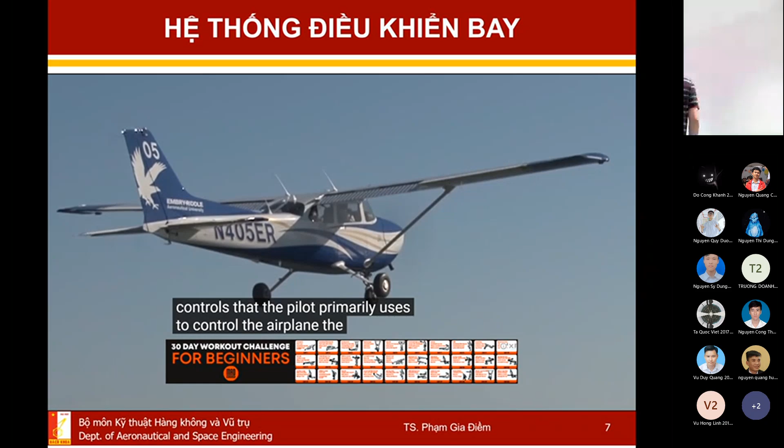Primary flight controls are simply those flight controls that the pilot primarily uses to control the airplane. The three primary flight controls are the ailerons, elevator, and rudder. Secondary flight controls, on the other hand, are used to change the airplane's performance and lighten the pilot's workload. The two secondary flight controls we'll discuss are the flaps and trim.

The pilot controls the ailerons and elevator with a yoke or stick, and the rudder with the rudder pedals. In most general aviation airplanes, as the pilot moves the controls, he or she is moving steel cables or push rods connected through other linkages that physically move these controls.

As the control surface is deflected, the airflow is changed, which results in an aerodynamic force changing the airplane's path through the air. Let's investigate the three primary flight controls in more detail.

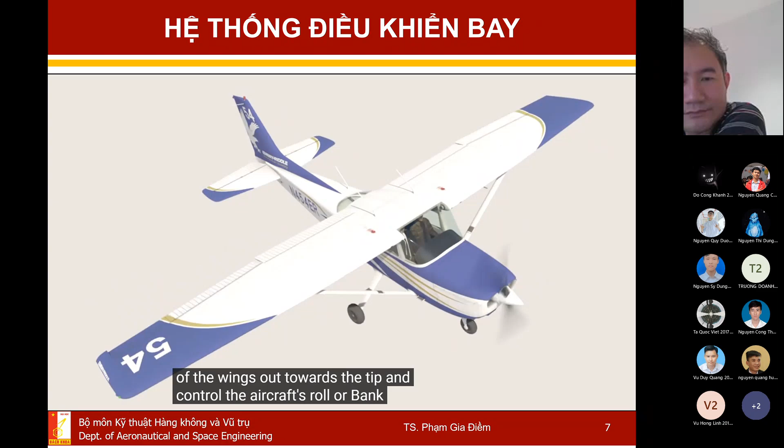The ailerons are located on the back end of the wings, out towards the tip, and control the aircraft's roll or bank. When the pilot moves the controls to the left, the left aileron is deflected up, creating a downward force, and the right aileron is deflected down, creating an upward force. This results in the airplane rolling to the left.

The opposite would happen if the pilot were to move the controls to the right.

The elevator is attached to the back of the horizontal stabilizer and controls the airplane's pitch, which allows the airplane to climb or descend. When the pilot moves the controls forward or aft, the elevator rotates, deflecting the air and creating a force that results in the airplane's pitch changing.

If the pilot pulls back on the controls, the elevator will move up, creating a force that pushes the tail of the airplane down, thereby making the nose pitch up and causing the airplane to start climbing.

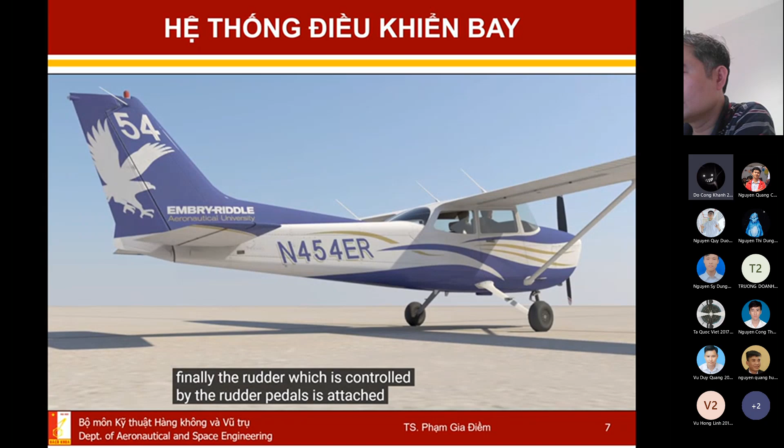Finally, the rudder, which is controlled by the rudder pedals, is attached to the back end of the vertical stabilizer. As the pilot pushes on one of the rudder pedals, a cable connected to the rudder allows it to move. Just like the other flight controls, as air moves around the deflected rudder, a force is applied, making the airplane yaw. Simply, if the pilot pushes the left rudder pedal, the nose of the airplane will slide to the left.

The easiest way to envision this is to think of an airplane suspended on a string above the ground. If you and your friends were to walk up to the rudder and push as hard as you could towards the right, what do you think would happen? The tail of the airplane would move to the right, and the nose would move to the left. It's that simple. We use the rudder in coordination with the ailerons to turn the airplane.

The primary flight controls, then, fundamentally work the same. The pilot moves a control in the cockpit, which, through cables and other linkages, moves that control surface. As that surface is moved, the airflow around it gets deflected, creating a force, and results in the airplane either rolling, pitching, or yawing.

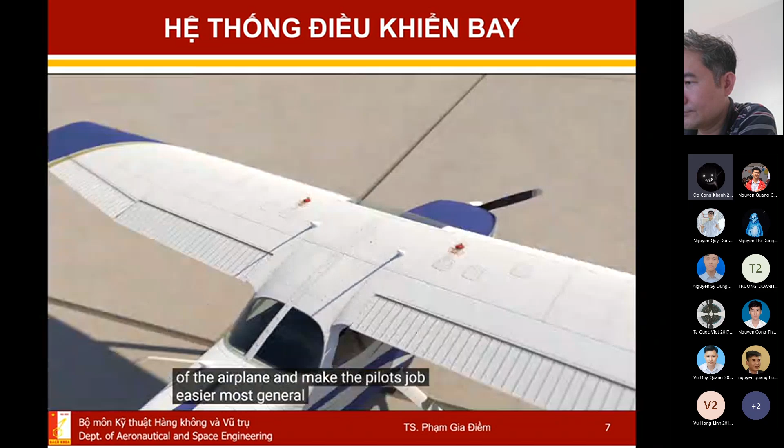In order to help improve the performance of the airplane and make the pilot's job easier, most general aviation airplanes are equipped with flaps and trim, known as secondary flight controls. Let's examine these further. The flaps are located on the back side of the wing, close to the fuselage.

They are primarily used to help increase lift during takeoff and landing. The pilot controls the flaps by moving a lever in the airplane, which either electrically moves the flaps by a motor, like on the Cessna 172, or the pilot manually moves the flaps using a lever, like on the Piper Arrow. In either case, as the pilot extends the flaps, the shape of the wing changes, which increases lift.

This allows the airplane to fly at slower airspeeds and make steeper approaches to landing. This is extremely beneficial during takeoff from a short runway because it allows the airplane to take off at a slower speed, meaning it will use less runway.

During landing, the pilot uses flaps to allow the airplane to land at a slower airspeed, using less distance to decelerate and stop.

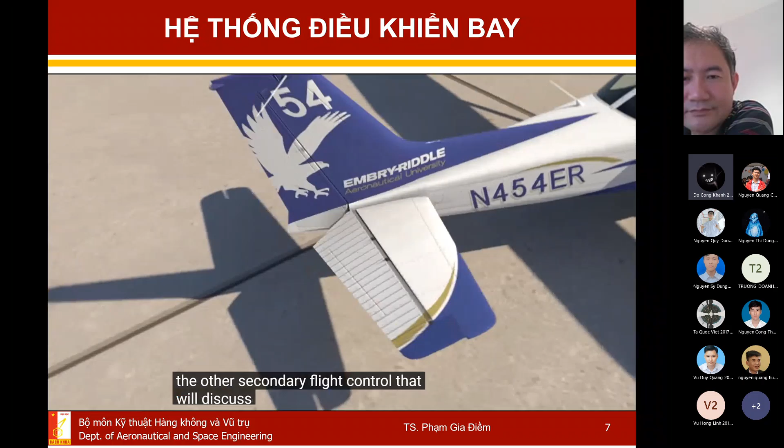The other secondary flight control that we'll discuss is trim. Trim is used to make the pilot's job easier and allows the airplane to essentially fly itself with fewer control inputs by the pilot.

The Cessna 172, like most training airplanes, has two trims: one that the pilot can directly control through cables on the elevator, and the other a ground-adjustable tab on the rudder. The elevator trim is typically controlled through a wheel inside the cockpit labeled nose down or nose up. As the pilot moves this wheel, the cables adjust the elevator trim tab, located on the aft or back end of the elevator.

Usually during takeoff, the trim tab is in its neutral position, meaning it is just about flush with the elevator. As the pilot climbs, however, he or she may trim the airplane to help relieve control pressure and prevent pilot fatigue. If he or she wants to climb at a specific airspeed, the trim can be adjusted to maintain that airspeed.

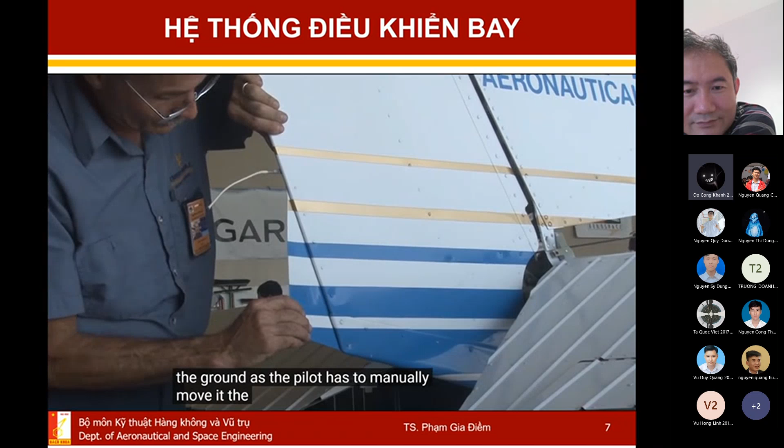The rudder has a ground-adjustable trim tab, meaning it can only be adjusted while on the ground, as the pilot has to manually move it. The rudder's ground-adjustable tab helps the pilot during climb because of the left turning tendencies the plane has while climbing. We'll talk more about those turning tendencies in a future lesson.

It is obvious that flight controls are a necessity for the pilot to fly the airplane. The pilot manipulates these flight controls to achieve the desired performance out of the airplane. Now that we have a basic understanding of the components of the airplane and how the pilot controls different surfaces, let's go under the hood of the airplane and investigate the power plant.

Ok, the flight controls consist of various...

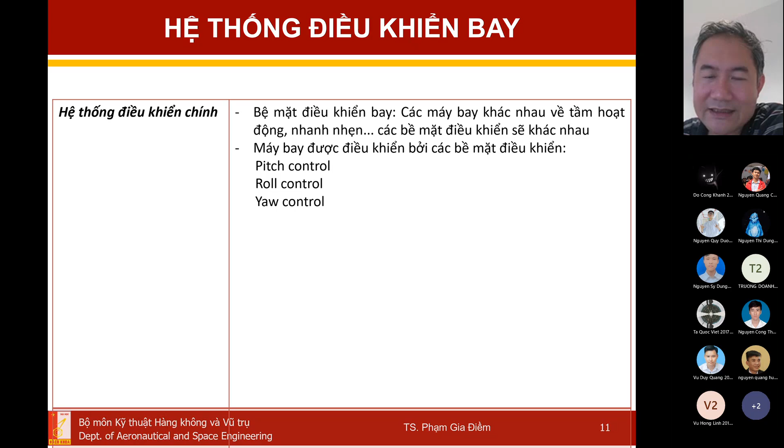Ví dụ như tàu lượn chẳng hạn, tàu lượn dạng không có động cơ, các bạn có thể lao từ trên đỉnh núi đi xuống mà nó cứ dựa vào khí động của luồng khí thì người ta vẫn phải bay được, giống như bề mặt của con chim đại bàng lượn trên trời, hoặc con chim hải âu vân vân.

Xem đi, giải thích qua một chút cho nó hiểu.

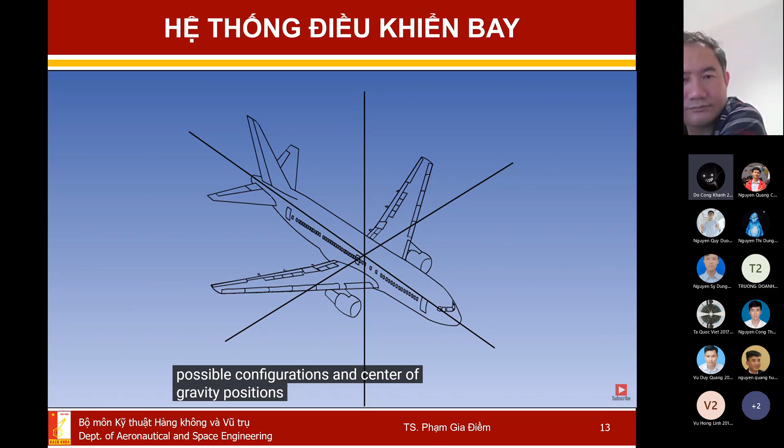For steady flight, the aircraft must be in a state of balance, with zero moments around its axes. The primary flight controls are designed to enable this to be achieved for all possible configurations and centre of gravity positions. The controls are also required to manoeuvre the aircraft around its three axes. The three axes about which an aeroplane rotates are the lateral axis, the longitudinal axis, and the normal axis.

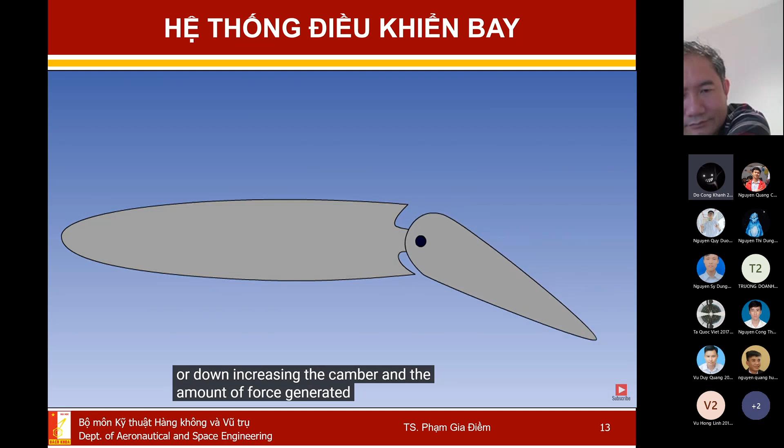The movement around an axis is produced by changing the aerodynamic force on the appropriate aerofoil, wing, tail, or fin, and this may be done by changing the camber of the aerofoil by deflecting a control surface, changing the angle of attack or incidence of the aerofoil, or decreasing the aerodynamic force by spoiling the airflow. The most common method used is to change the camber of the aerofoil. This is done by deflecting a control surface on the trailing edge of the aerofoil, either up, decreasing the camber and the amount of aerodynamic force generated, or down, increasing the camber and the amount of force generated. This principle can be applied to control about each of the axes.

The aircraft rolls about its longitudinal axis. The devices most commonly used to control roll are the ailerons. The ailerons are operated by rotating the control wheel or yoke, or by moving the control column or stick laterally. Rotating the control wheel clockwise will cause the left aileron to move down and the right aileron to move up. The aircraft will bank to the right. Counterclockwise rotation of the control wheel will have the opposite effect. That is, the aircraft will bank to the left.

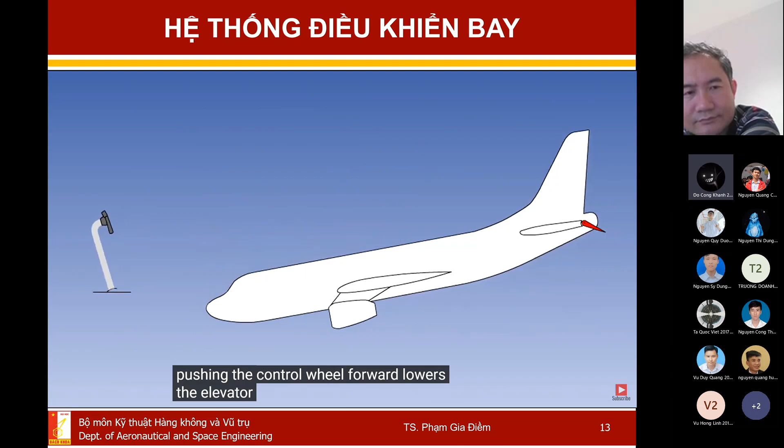The aircraft pitches about its lateral axis. Pitch control is most commonly achieved by the use of elevators. The elevators are controlled by moving the control wheel or control column fore and aft. Pushing the control wheel forward lowers the elevator and the aircraft pitches down. Pulling back on the control wheel raises the elevator and the aircraft pitches up.

The aircraft yaws about its normal axis. Control in yaw is normally achieved by the use of a rudder. The rudder is controlled by the rudder pedals. Pushing the left pedal forward causes the rudder to move to the left, and the aircraft nose to yaw left. Pushing the right pedal forward causes the rudder to move to the right, and the aircraft nose to yaw right. The ailerons, elevators and rudder are known as the primary flight controls.

That is the end of this introductory lesson. You now know that ailerons control the roll of the aircraft about its longitudinal axis, that elevators control the aircraft's pitch about its lateral axis, and that rudders control yaw about the normal axis.

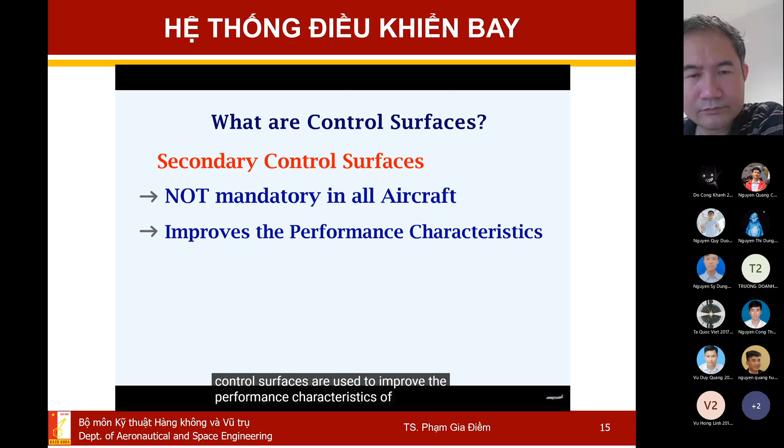Now let's look at the secondary control surfaces. Unlike primary control surfaces, these are not mandatory in all aircraft. These control surfaces are used to improve the performance characteristics of the airplane and also provide assistance in flying the aircraft. Now let's look at some secondary control surfaces.

The next secondary control surface we will look at is the slats. Slats are located on the leading edge of the wing. They are also classified as a high lift device. Like flaps, the slats can only extend downwards. As it goes downwards, the camber increases, so the lift also increases because of the increase in CL. The main advantage of the slat is that it increases the stall angle, so the aircraft can fly at a higher angle of attack. Like the flaps, the slats also have different configurations and are used during takeoff and landing.

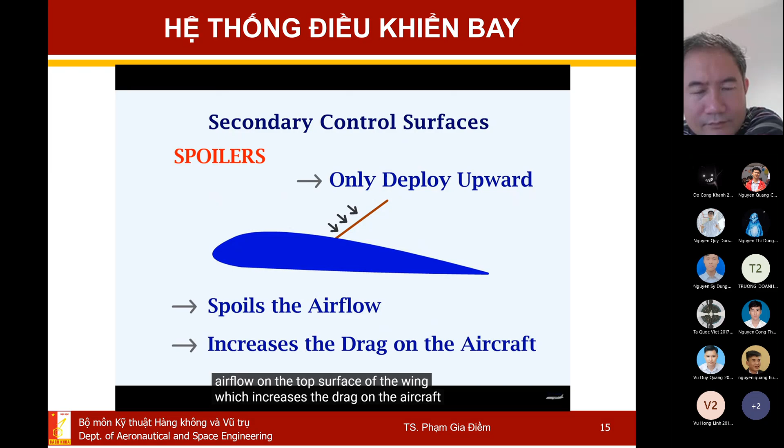The next secondary control surface we will look at is the spoilers. The spoilers are located on the upper surface of the wing. They are mainly used to reduce the speed and the lift of the aircraft. The spoilers can only deploy upwards. This spoils the airflow on the top surface of the wing, which increases the drag on the aircraft. Spoilers are used in flight to reduce the aircraft's speed and to rapidly decrease the aircraft's altitude. They are used during landing to rapidly increase the drag to stop the aircraft safely. The difference between spoiler extension in flight or during landing is that the angle of deflection changes.

First, let's look at balance tabs. If the elevator has to be deflected down, the tab will be deflected up. The airflow will push the tab and the elevator downwards. Hence, the balance tabs will assist in the deflection of the control surfaces. So, if the elevator has to be deflected up, the tab has to be deflected down. Now, the airflow will push the tab and the elevator upwards. This is extremely helpful if the aircraft has a cable pulley system for the flight controls.

Now, let's see trim tabs. These tabs are controlled by a trim wheel and are used to reduce the pilot's workload.

Hello, this is Tim. Today we will talk about the secondary control surfaces of an aircraft. First, let's see what control surfaces are. Control surfaces can be classified as primary control surfaces and secondary control surfaces. The primary control surfaces are elevator, rudder, and ailerons. They are used to pitch, yaw, and roll the aircraft. The primary control surfaces are mandatory in all aircraft.

Now let's look at the secondary control surfaces. Unlike primary control surfaces, these are not mandatory in all aircraft. These control surfaces are used to improve the performance characteristics of the airplane and also provide assistance in flying the aircraft. Now let's look at some secondary control surfaces.

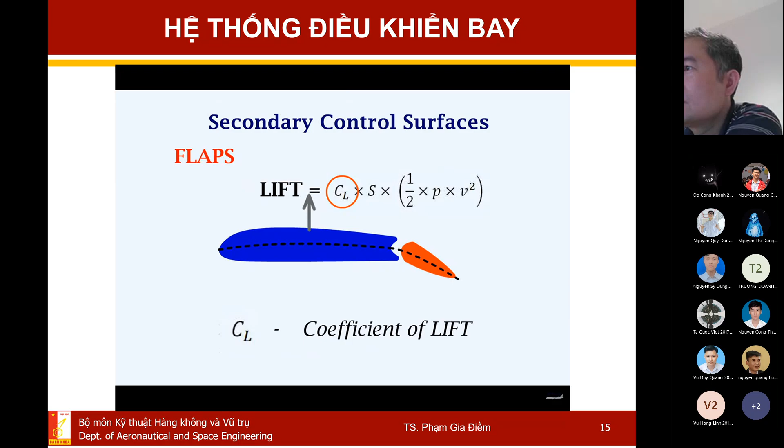This is the lift equation. When the camber increases, the value of CL, or the coefficient of lift, will increase, so the lift increases. Flaps will have more than one setting or angle of deflection and are used during takeoff and landing. These settings are also called configurations. Flaps are locked in a particular configuration by pressure brakes. During takeoff, flaps are extended to a small angle, and during landing, they are extended to the maximum angle. So the flaps provide high lift at low velocities.

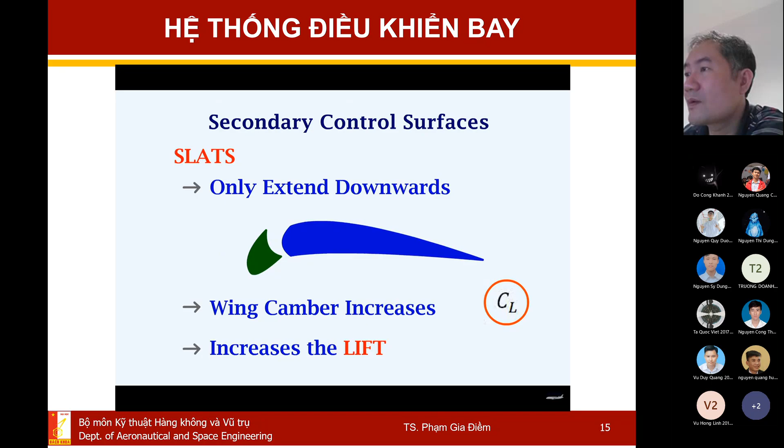The next secondary control surface we will look at is the slats. Slats are located on the leading edge of the wing. They are also classified as a high lift device. Like flaps, the slats can only extend downwards. As it goes downwards, the camber increases, so the lift also increases because of the increase in CL. The main advantage of the slat is that it increases the stall angle, so the aircraft can fly at a higher angle of attack. Like the flaps, the slats also have different configurations and are used during takeoff and landing.

In some aircraft, when they are flying at high angles of attack, the air is allowed to flow through the gap between the slats and the wing. These are called slots.

The next secondary control surface we will look at is the spoilers. The spoilers are located on the upper surface of the wing. They are mainly used to reduce the speed and the lift of the aircraft. The spoilers can only deploy upwards. This spoils the airflow on the top surface of the wing, which increases the drag on the aircraft. Spoilers are used in flight to reduce the aircraft's speed and to rapidly decrease the aircraft's altitude. They are used during landing to rapidly increase the drag to stop the aircraft safely. The difference between spoiler extension in flight or during landing is that the angle of deflection changes.

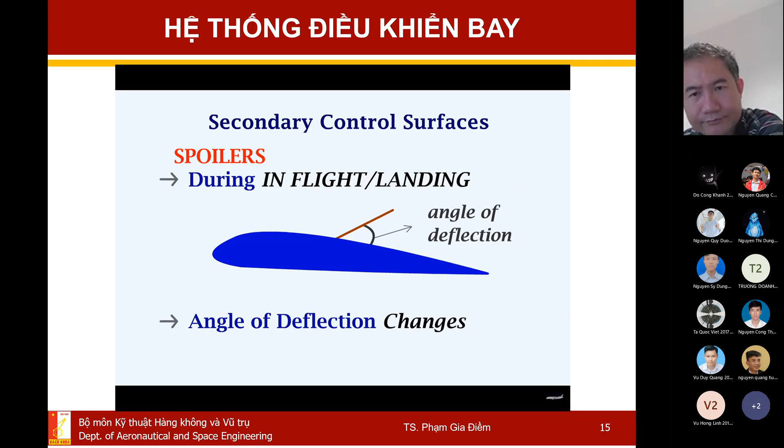The next secondary control surface we will look at is the tabs. These are installed on the primary control surfaces of an aircraft. The tabs are installed on the trailing edge of the primary control surface. Let's look at the horizontal stabilizer to understand the working of tabs. This is the elevator and this is the tab attached to the elevator. The tabs can be classified as balance tabs or trim tabs.

First, let's look at balance tabs. If the elevator has to be deflected down, the tab will be deflected up. The airflow will push the tab and the elevator downwards. Hence, the balance tabs will assist in the deflection of the control surfaces. So, if the elevator has to be deflected up, the tab has to be deflected down. Now, the airflow will push the tab and the elevator upwards.

This is extremely helpful if the aircraft has a cable pulley system for the flight controls.

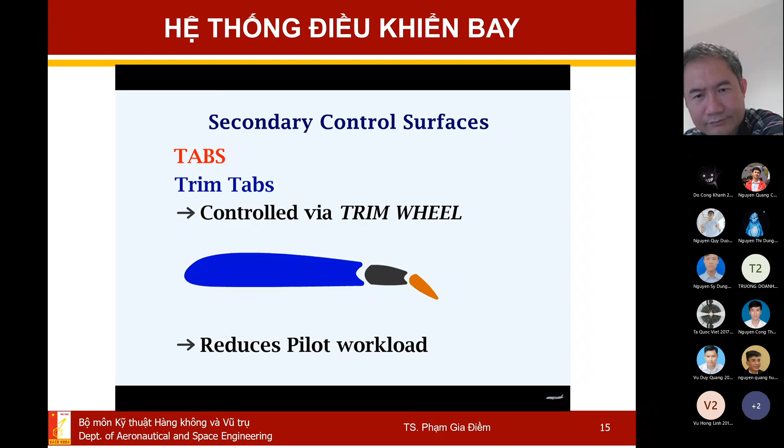Now, let's see trim tabs. These are controlled by a trim wheel and are used to reduce the pilot's workload. To understand this, let's consider an aircraft flying with a nose up condition. Now the aircraft is said to be out of trim.

For efficient flying, the aircraft must be flown straight and level, which means the aircraft needs to be trimmed for level flight. The pilot, however, cannot keep holding the control stick forward throughout the flight, so the trim tab becomes useful. Once the tab is deflected up, the elevator gets deflected down, and the tab is locked in this position. The aircraft is now trimmed because the elevator will maintain level flight without any pilot input.

We have seen some secondary control surfaces such as flaps, slats, spoilers, and tabs. Depending on the airplane's requirements, one or more secondary control surfaces will be installed.

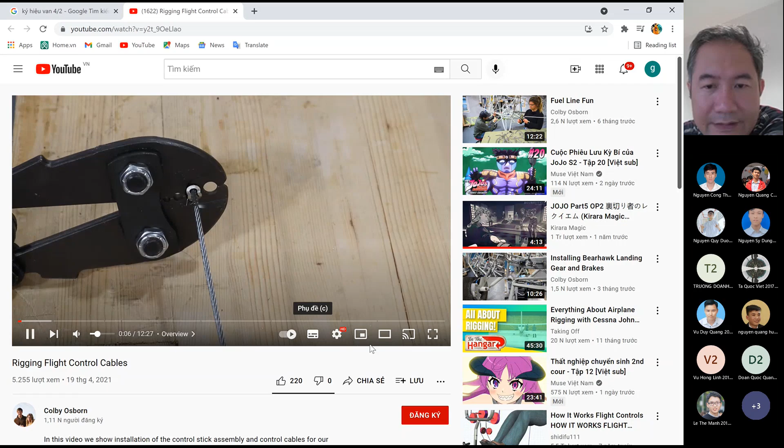Hey guys, welcome back. In this video, we're going to look at installing the control stick assembly and then installing control cables. We've installed the control cables for the elevator trim, the flaps, and the rudder pedals. So stick around and we'll show you in more detail.

Okay, so we started with installing the control stick assembly. This was done by first bolting the control stick in place. Then the control stick connecting tube attached to the bottom of both control sticks.

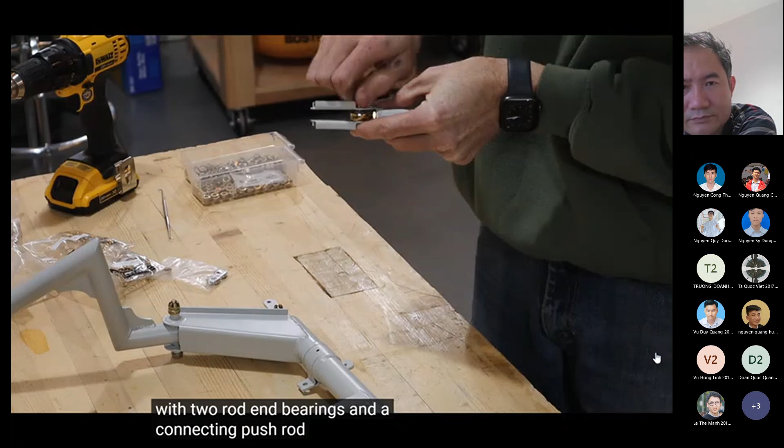Next, we pushed the bearings into the elevator bell crank. The control stick assembly attaches to the elevator bell crank with 2 rod end bearings and a connecting push rod. All of these little pieces came with the kit.

The builder's manual instructed us to make sure the aileron cables are as closely aligned as possible with the pulleys on the fuselage. So we lined up the control stick assembly in this manner before drilling the holes in the mounting tabs.

Next, we attached the turnbuckles to the bell crank. The end that attaches to the bell crank is bushed out to the size of an AN3 bolt. The turnbuckle ends are narrower than the opening in the bell crank, so I used washers for spacers. The bell crank uses a bolt as an axle.

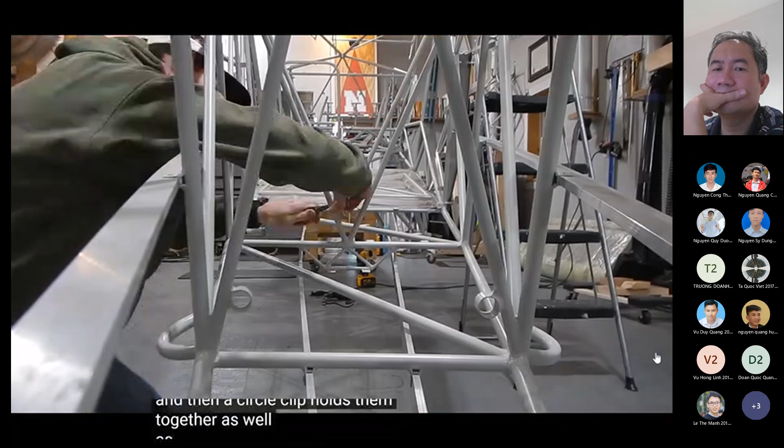Then, rod end bearings connect the bell crank to the control stick assembly with a connecting push rod. Next, we installed the fair leads. The ones I received with the hardware package come in 2 pieces, and then a circle clip holds them together as well as keeps them from sliding back out.

After the fair leads were in place, I installed the pulleys on the belly that the elevator and flap cables use.

Next, we used mason line to roughly measure the length of the elevator control cables. To cut the cables, we wrapped them with tape where the cut needed to be made, and then used a cold chisel to make the cut.

To create the eyes at the end of the cables, we used NicoPress sleeves and thimbles. We'd start by sliding the sleeve on and looping the cable back through the second hole in the sleeve. Then, we frequently used a cable clamp to hold everything in place so it wouldn't move before making the first crimp. Next, we put the thimble in place, leaving a little slack since the sleeve will grow a little as it's compressed.

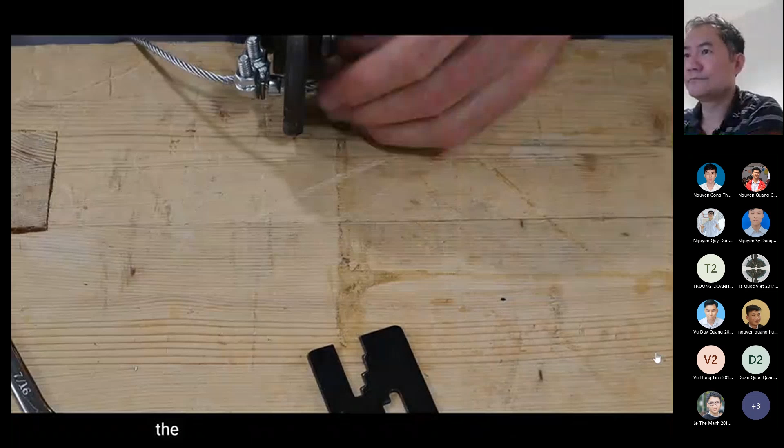When everything was lined up perfectly, we'd make a crimp in the center of the sleeve. The second crimp is then made closest to the thimble, and the third and final crimp is made at the tail end.

We'd check every crimp with the go-no-go gauge that came with the crimping tool. For the elevator control cables, we made the NicoPress swages on the tail ends and put them in place first. Then we attached the front end.

On this end, I set the turnbuckles with about 5 threads showing and rigged them up hand tight, holding the position with a cable clamp and then crimping them. I haven't tensioned the cables to the final value yet, but I'm hoping this method will leave the turnbuckles in the middle of their range once the cables are tensioned.

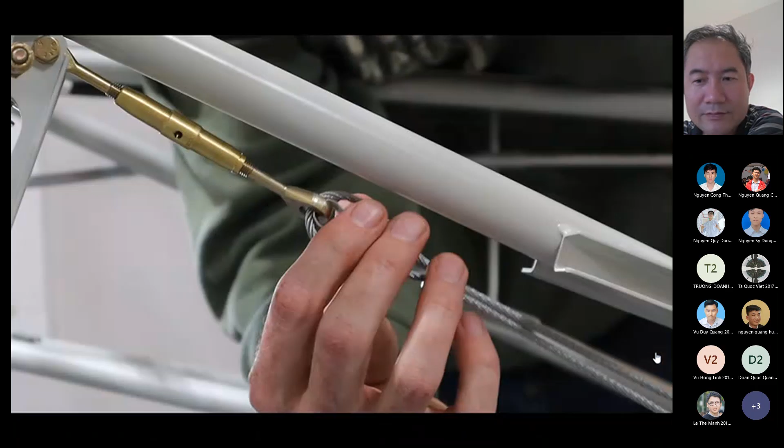Next, we rigged the rudder cables. These attach to shackles on both ends and don't require a turnbuckle if you don't want them. I started by attaching the ends for the rudder. The kit comes with a couple of metal extension straps that attach to the rudder pedal arms, and a shackle attaches to the aft end of these straps. Then I temporarily rigged the rudder control cables to these shackles.

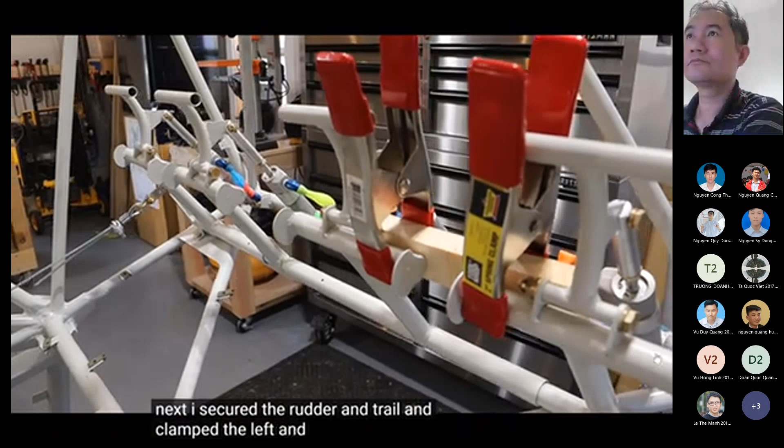Next, I secured the rudder in trail and clamped the left and right rudder pedals in line. Afterwards, I set the angle of the rudder pedals to match the drawing in the plans. With everything positioned and the cables on both sides tensioned equally hand tight, I crimped the NicoPress sleeves.

Any of the cables that were crimped with a longer than desired tail, we used a little cutoff wheel and a Dremel to trim them to length.

Next, I cut a spring to the desired length and attached it to the tab welded on the fuselage and the front end of the metal extension strap on the rudder arms.

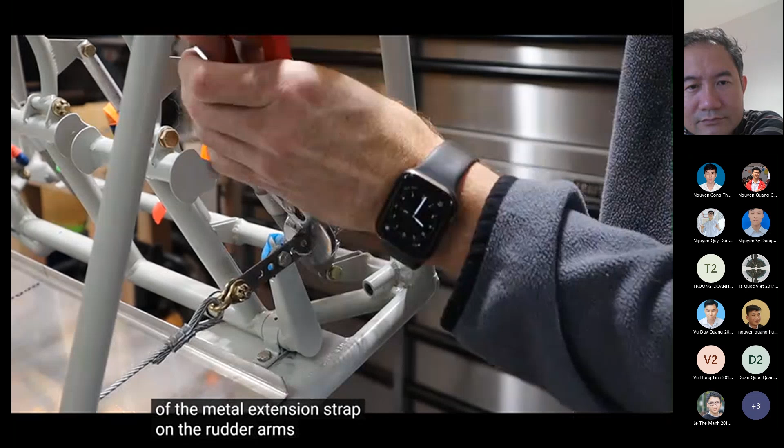After the rudder cables were in place, we took note of where the cables will penetrate the fabric in the tail. We did this using a straight edge to see where the cables intersect the plane of the fabric, measuring in the XY direction from benchmarks, and writing this information down. I'm told this will be important information down the road.

Next up was the elevator trim cable. First, we marked and drilled where we wanted the cable to penetrate the former or bulkhead at the back end of the skylight area. One important consideration is an aileron cable will pass through this area, so you need to make sure they won't be in the same plane. Not that kind of plane, Teal.

We used a fair lead at this location. I cut a short piece of aluminum tubing to support the fair lead and act as a spacer between the bulkhead and the fair lead clip.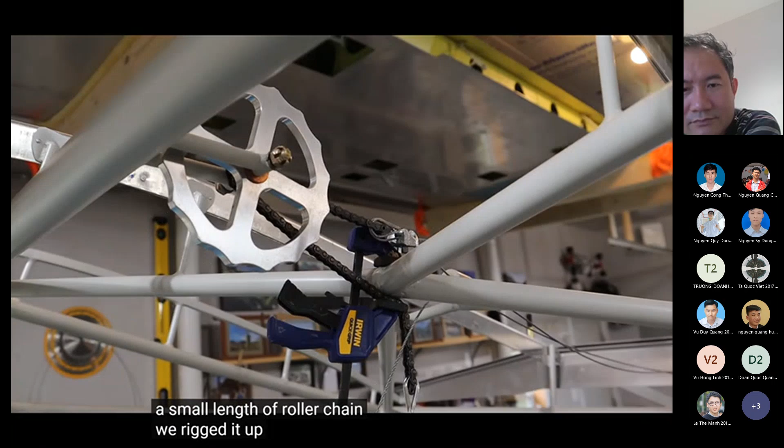At the front, the trim cable attaches to a small length of roller chain. We rigged it up with some cable clamps to figure out how long this chain needed to be to allow the full range of motion without running into the first fair lead or running out of links for the sprocket. We then marked and cut the chain.

Dash 3 thimbles are slightly too wide to fit through a number 25 roller chain, so we compressed the thimbles a little bit with a vise so they would slide onto the chain. Then we crimped one end of the trim cable to the chain. This is 16th inch cable, and the NicoPress crimpers I have only require one crimp for sleeves this size.

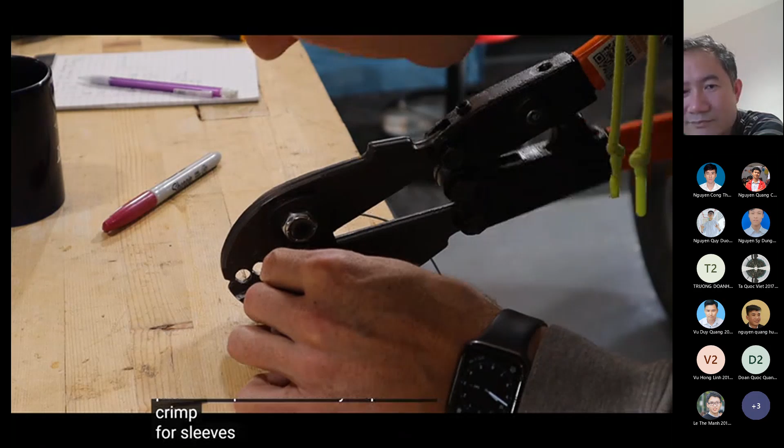We're using one turnbuckle for the trim system since it's a closed loop, and I installed it in the cabin between the first two fair leads. To finish up the trim cables where they attach to the trim horns in the tail, I crimped them once the cables were hand tight.

The last thing we did was run the flap control cables. Some of the pulleys inside the fuselage need cable retainers. We made these by forming 032 aluminum straps around a piece of wood the same thickness as the pulleys. Then I marked where to drill the holes and drilled both holes at once.

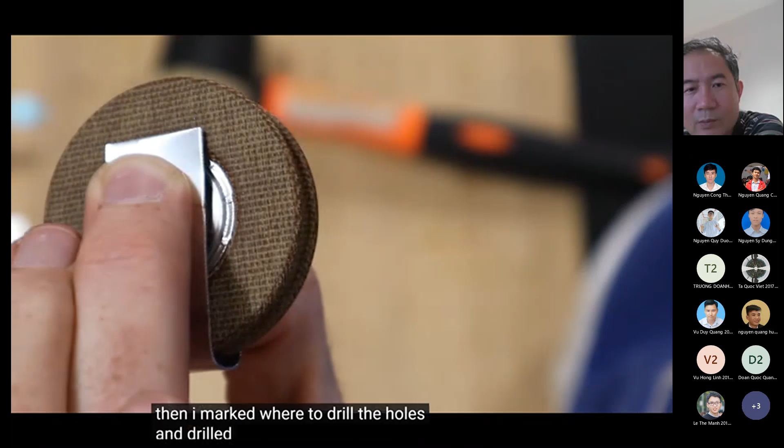After the cable retainers were made, we installed the 4 upper pulleys for the flaps. Many people make these cable retainers so they can't rotate even if the nut on the pulley were to loosen. We have not done that, and we're relying on the tension to keep the retainer from rotating. I think this is fine for flap cable pulleys, but is something I might revisit on a later date.

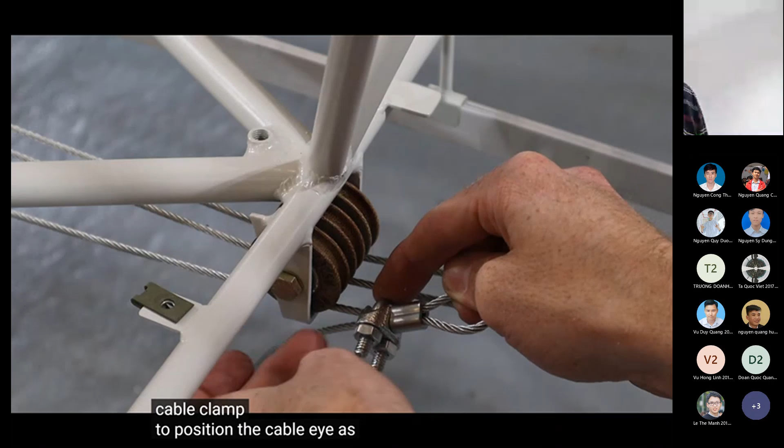The main flap cable hooks to the flap lever with a shackle. Then the cable runs back behind the cargo bulkhead where the cable forks. I'm told that it's important to keep this junction as low as possible to ensure that you can get full flap deflection. With the flap lever in its maximum deflection notch, I used a cable clamp to position the cable eye as low as I could reasonably get it.

From this point, the flap cable is attached to a triangle with a shackle. The other 2 corners of the triangle get a turnbuckle. Then the cable goes towards each wing root area where they will attach to the flap actuation arms. I've left them long and will finish them once the wings are on.

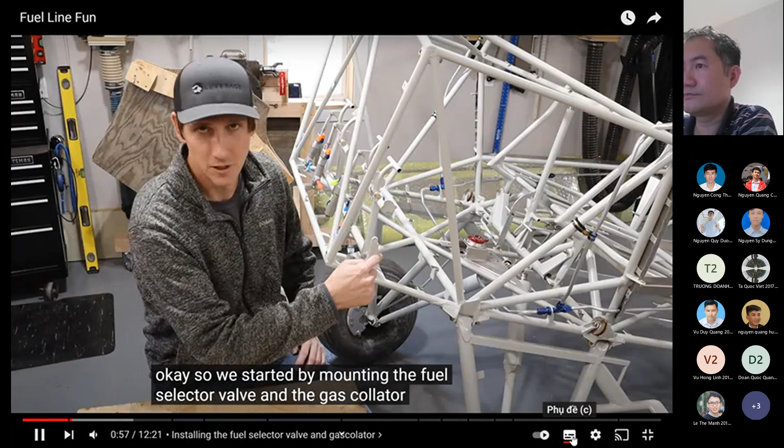We started by mounting the fuel selector valve and the gascolator to the mounting plate. These items came with the kit. We started by marking the location of the fuel valve and its bracket, then cut a notch out with a bandsaw that will allow the valve to slide into place.

Next, we prepared the fuel valve and gascolator. First, we installed the quick drain valve on the bottom side of the gascolator. We used Loctite 565 anywhere there were NPT threads. The fuel selector and gascolator are joined with a pipe thread nipple.

The gascolator came with fittings that accept NPT fittings. We installed those and then used NPT to AN fittings. The right side is close to a fuselage tube on our install, so we used a 45-degree elbow on this side.

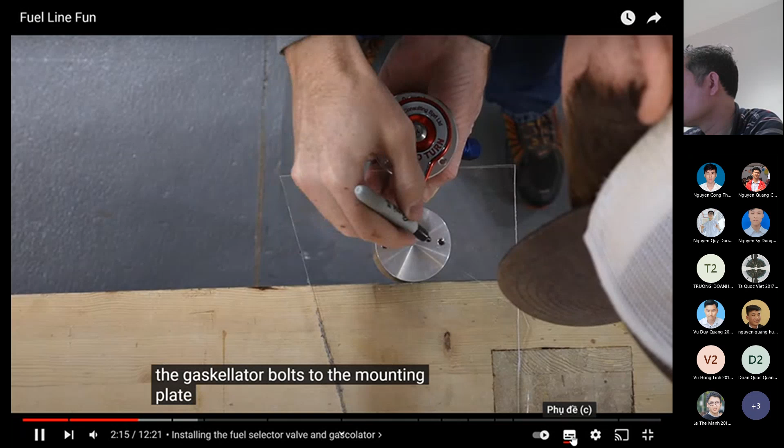The gascolator bolts to the mounting plate. To ensure we drilled the holes in the correct spot, we first marked and drilled holes on a scrap piece of plexiglass and then used that to transfer the holes onto the mounting plate.

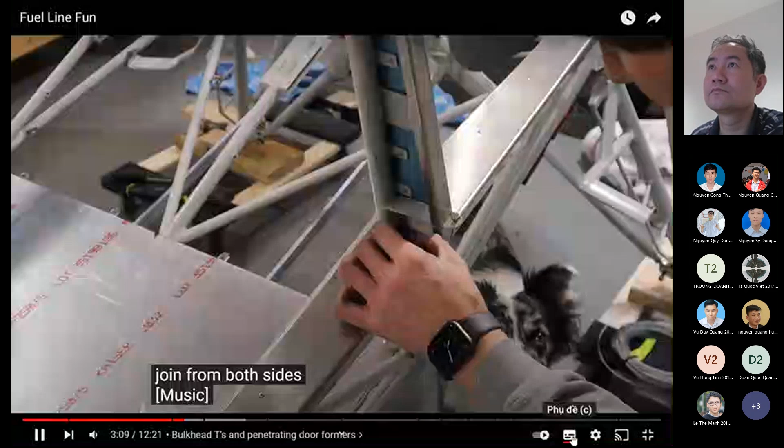Next, we installed the bulkhead tees where the front and aft fuel lines join both sides. Then, we drilled holes through all the door formers and all the locations the fuel lines will penetrate.

This method worked okay for bending fuel line, but was a long ways from an exact science, so it didn't work quite so well in areas where the tolerances were more strict.

The second method I used was to mark where the bend should be, draw a perpendicular line along the axis of the bend, and then increase the angle of the bend until it worked. This was more precise, but I still found it difficult to make the bend exactly where I needed it to be, especially when there were multiple bends close together.

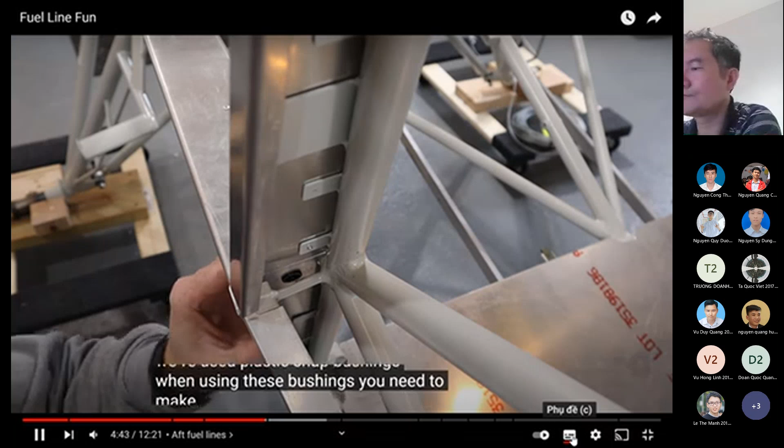Most of the places we penetrated formers, we used plastic snap bushings. When using these bushings, you need to make flares, and in some cases add heat shrink before that. Afterwards, we put a dab of oil on the head of the flaring tool, slide it onto the fuel line until we hit the tool's depth gauge, and then clamp the tool down. At that point, you can just tighten down the head to create the flare on the end of the tubing.

I'm not sure if this is common for EAA chapters, but our local chapter has a toolkit. The chapter has purchased some tools, and many builders have contributed their own tools to this toolkit. Other members can then check them out and use them for their own project. Most of the tools needed to run our fuel lines we were able to borrow from another local builder through the chapter's toolbox.

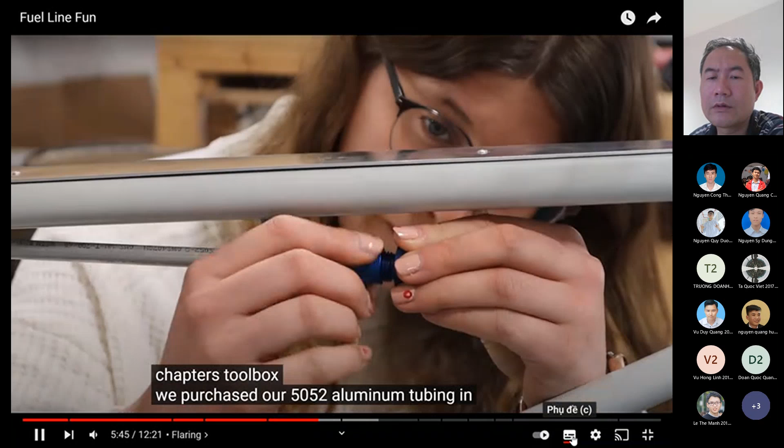We purchased our 5052 aluminum tubing in 6-foot lengths because longer lengths were more expensive to ship. The downfall is a union is then required to get the aft fuel lines to the bulkhead tees.

The front fuel lines come down along the fuselage tube along the window and then weave around a bit down to the bulkhead tee.

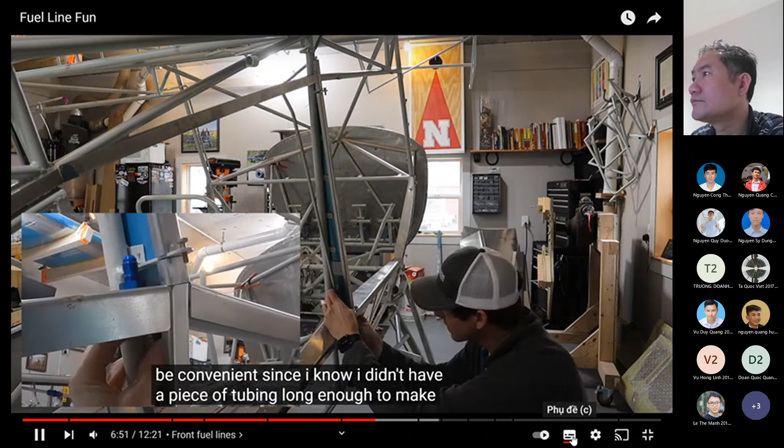We did the other side nearly identical, with the exception of needing to penetrate the cargo door former. I installed a rubber grommet in this location, but initially tried using a bulkhead 45-degree fitting. I thought a bulkhead fitting here would be convenient since I didn't have a piece of tubing long enough to make it all the way to the bulkhead tee. But a 45-degree bulkhead fitting here would lower the fuel line more than I wanted.

The fuel line at this point needs to be kept as high as possible to avoid creating a low spot in the fuel system while in a 3-point attitude.

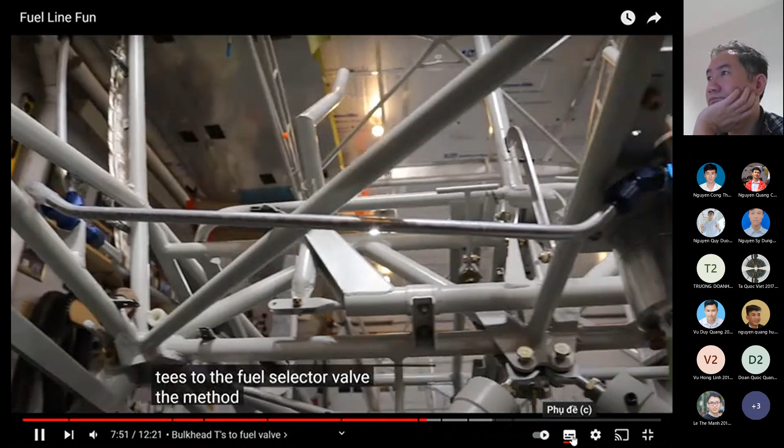After the front and aft fuel lines were joined at the bulkhead T's, we ran short lines to connect the T's to the fuel selector valve. The method we used does create a little bit of a low spot right before the fuel selector valve. We're comfortable with that, given a freshly sumped gascolator could easily accommodate the small amount of water that could potentially collect at this location.

After all the lines were ran to the fuel selector valve, we went back and secured them. We used padded Adel clamps in most places. Anywhere the fuel lines are close to contacting the fuselage tubing, we put some clear heat shrink around the fuel line, just to make ourselves feel better. In a couple of spots, we even doubled it up.

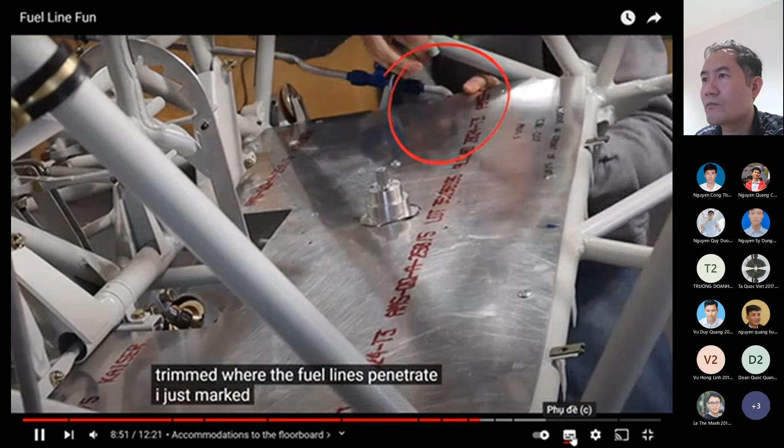Next, we cut a hole in the floorboard for the fuel selector valve. I used a jigsaw and then fine-tuned with a file. The floorboards also needed to be trimmed where the fuel lines penetrate. I just marked them in place and used a Dremel to remove material until I was satisfied with the clearance around the fuel line.

Once the floorboard was trimmed properly, I fastened it in place and installed the fuel valve bracket. After it was in place, I drilled holes to secure the bracket to the mounting plate, as well as holes to fasten the bracket to the valve. Then we put the fuel selector valve knob back on to see how it looked.

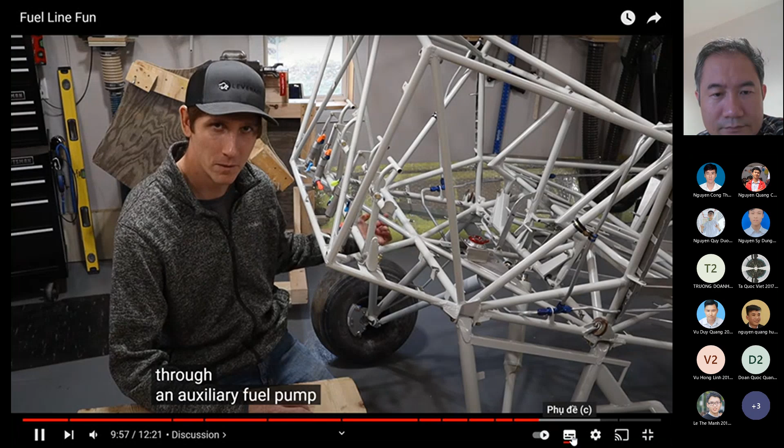We've stopped our install here at the gascolator because from this point, the install will vary based on our engine and fuel metering selection. If we do a carbureted O-540, we'll probably just exit the gascolator and loop around and penetrate the firewall here on the left-hand side. If we do a fuel injected IO-540, we'll probably go the other direction, and then it'll need to go through an auxiliary fuel pump and then penetrate the firewall on the right-hand side.

As far as tips or lessons learned, I wish I would have ordered more extra fuel line. I think I ordered like 2 extra pieces, and that would be fine for somebody that's handy or a quicker learner than I, but I think I used pretty much twice as much fuel line as it would have taken to complete it, making bends in not quite the right spot or a little too far. So I wish I would have ordered quite a bit of excess fuel line so I just had to pay shipping once.

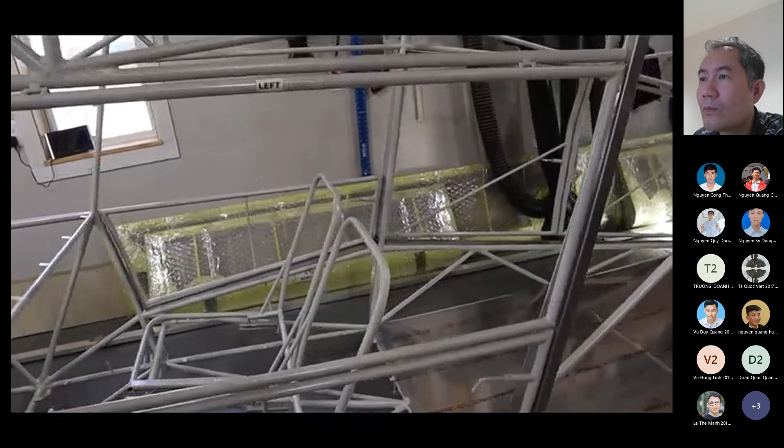The pieces that need bent come pre-bent as well. This basic design has an upper piece that we're referring to as the window that will hinge at the top and swing up and then latch on a piece underneath the wing. The bottom piece that we're referring to as the door hinges in the front and will swing out open like that.

The first thing we did was attach the outside trim pieces. These pieces do two things. First, they hold the window on the outside so it doesn't fall out, and second, they overlap the formers on the fuselage.

So when we're finishing, we can put some weather stripping there to help seal things up. To install the outside trim pieces, we first marked the center line and then marked the locations to drill. This is where bona fide builders would use a spacing fan. Next, we drilled all the holes in the outside trim pieces.

Then we carefully lined the center pieces up on the center of the window frame tube and clamped it in place. Making sure these holes are exactly in the middle of the tube will help keep the trim piece nice and flat once it's riveted in place. I clamped it in place and then drilled the holes in the frame, adding clecos as I went.

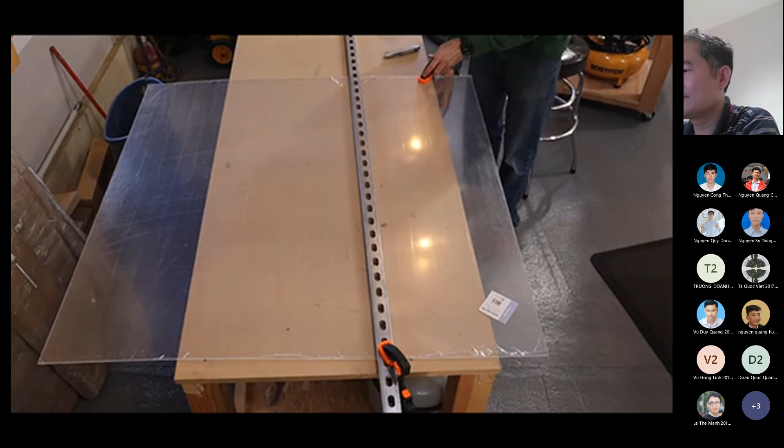Next, we cut the plexiglass. I marked the cut line using the window frame. Then I tried a couple of different ways to cut the plexiglass. One was the score and snap method. The second was using a cutoff wheel and a grinder. Both seemed to work fine, but I think I preferred the cutoff wheel, especially for shorter cuts.

Once the plexiglass was cut, we clecoed the outside trim pieces in place, flipped the window, and set the plexiglass in place. The method we used to secure the plexiglass in the front windows was using the outside trim piece and then the inside trim piece to form a channel that the plexiglass then floats in.

First, we cut the bottom piece with the joggle in it to length and set it in place. Next, we went around the frame, cutting the angle pieces to fit. Afterwards, I cut miters in the top 2 corners by cutting one piece and then marking the angle on the second piece.

The bottom piece is riveted to the front trim piece. Next, I drilled holes for the rivets to fasten them together.

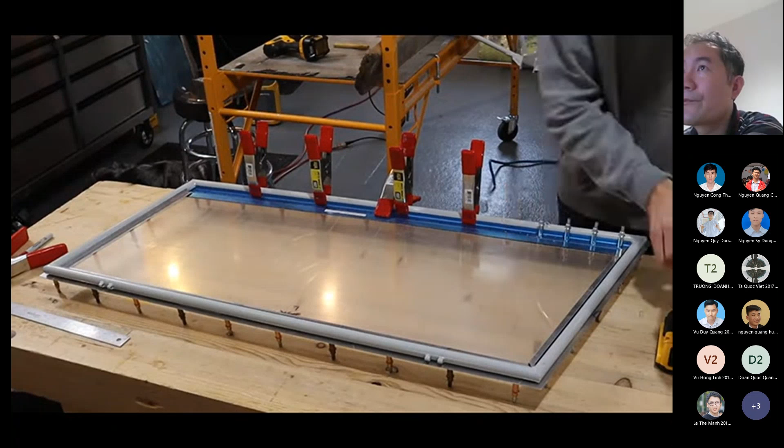At this point, we deburred everything and pulled the protective plastic off of the aluminum. I'm sure it's best to paint pieces like this when you're set up to spray other components, but instead we just sprayed them with self-etching primer from a rattle can and then spray painted the small pieces that would be contacting the frame.

Next, we riveted the outside and inside bottom pieces together, then just pop riveted the outside pieces to the frame.

At this point, we were ready to fasten the inside trim pieces to the window frame. To make it easier to drill them in place, I used a small scrap piece of plexiglass to establish the correct channel width and then clamp them in place. This made it easy to maneuver a drill as I worked my way around.

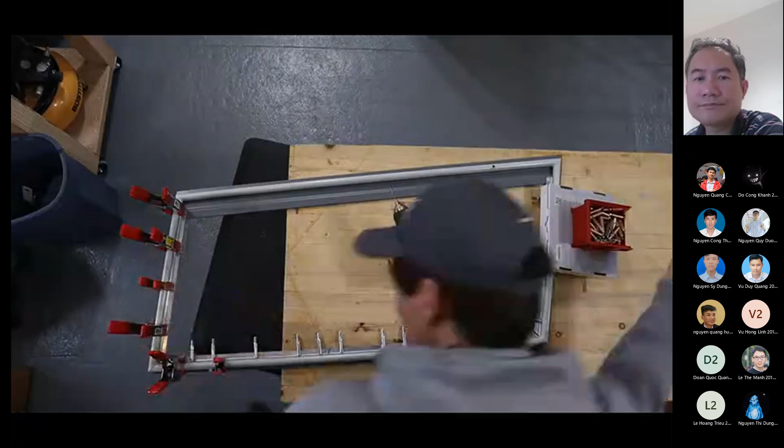To secure the inside trim pieces to the frame, I'm using small sheet metal screws. I won't permanently install the plexiglass yet, so I can take it out to paint the more visible pieces later on. But when we install the plexiglass for the last time, we'll put some sealing putty in the channel to help weatherproof it.

The standard Bearhawk door is skinned with aluminum. I clamped my door skins in place exactly where I wanted them, marked two holes, drilled them, and then clecoed them to lock the position.

Next, Amanda marked the center of each tube and drilled holes every two inches. After the holes were all drilled, I found a friend with a brake large enough to put a 90-degree bend at the top of my 40-plus inch door skins.

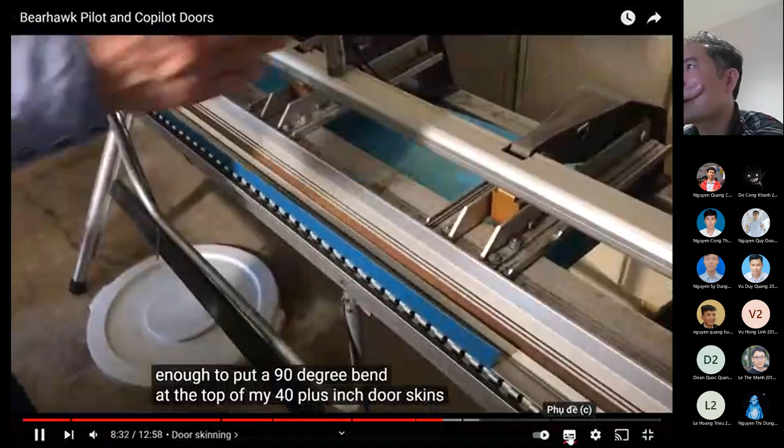In hindsight, I should have done this first, as the crease wasn't placed perfectly on either of the doors. After the crease, I trimmed off the excess and then cleaned up the cut with a file.

A standard Bearhawk door would look something like this, but we decided to put a little window in the front of the bottom door. Many builders decide to skin the entire lower front door with plexiglass, so I guess we kind of took the middle ground.

To create a channel for the plexiglass to sit in, we made a frame in SketchUp and had Tailored Printers make them with a 3D printer. I'm sure sheet metal savvy guys can do this cheaper and maybe lighter with aluminum, but this was by far easiest for me.

Next, we used the frames as a stencil to mark the plexiglass and then cut them out with a grinder.

The length was a little too long for this company's 3D printer, so I had them print them in two pieces and then we super glued them together. Really, the glue just makes it a little easier to handle and line up, but it won't really serve much of a purpose once fastened to the door skins.

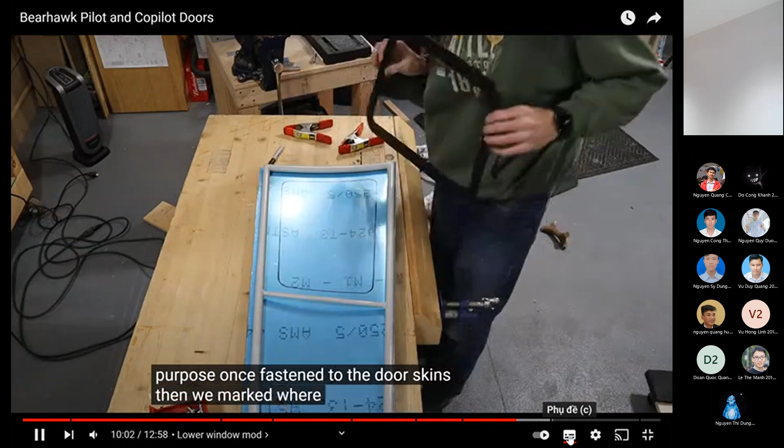Then we marked where to cut the door skins, drilled a starter hole, and cut them out with a jigsaw. Afterwards, I cleaned up the holes with a file.

Next, I drilled holes all the way around the frames, clamped them in place on the door skins, and drilled through the door skins.

Finally, the plexiglass could be placed between the frame and the door skins. I'm going to wait and give the door skins a proper paint job before permanently fastening the frames to them.

To finish up, we installed the lower door pins. We marked on the door formers where the pins hit and then drilled them out.

Then we put a spring on the pin and made sure it provided the resistance we desired, and then we bent the tabs over to hold everything in the tube.

As an aside, many Bearhawk builders install gull-wing doors or seaplane doors that they build themselves. Rob and Neb both have beautiful examples of that. I'll link their videos below if you'd like to check those out.

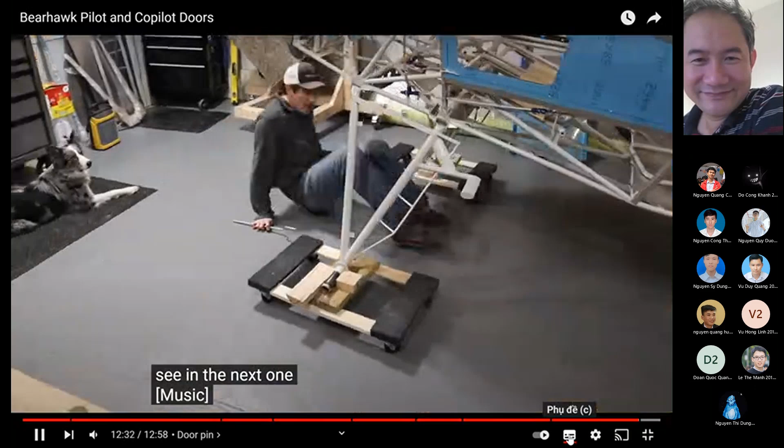Dakota, go get my marker.

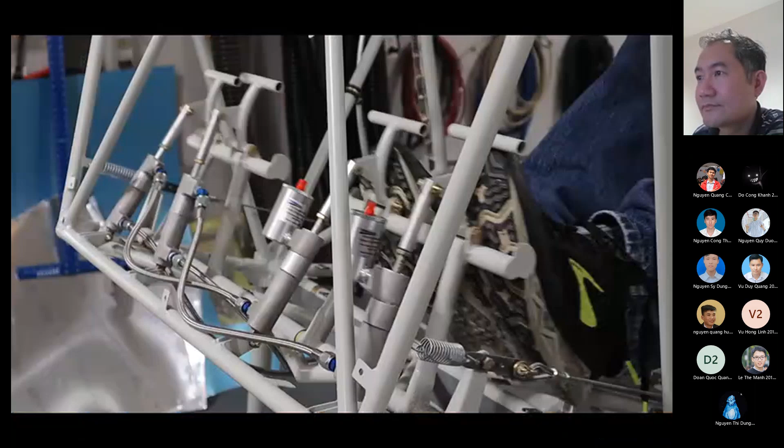Hey guys, in this video we're going to show you installing the main gear leg on our Bearhawk, the tires and the wheels, the brake calipers, and then in detail installing the rest of the brake system.

We started by assembling the shock struts. Bearhawk builder Ken has a YouTube video that details this process specifically. He does a better job showing it than I could, so I'll just link that video rather than trying to replicate it.

Next, we installed the main gear legs. Then the shock struts attached to the belly of the fuselage and to the main gear legs with large rod end bearings. These rod end bearings are threaded and allow for adjusting the spread of the main gear down the road.

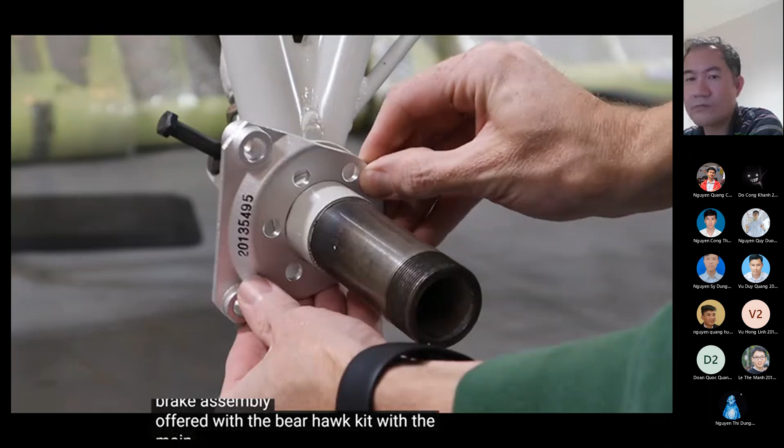We chose to go with the Grove wheel and brake assembly offered with the Bearhawk kit. With the main gear in place, I installed the torque plate for the brake calipers. To attach it, I clamped it in place and used a 3/8 spacer to perfectly center a 1/4 inch drill bit in the hole.

These drill bits are cheap from a big box store, so I used a new one for each hole. The instructions said only 3 or 4 holes needed drilled out, so I used 4. Once the holes were drilled, I used a reamer to make them final size. Next, I used a Dremel to remove a small amount of weld directly below the washers to allow them to lay flat. After a little touch-up paint and primer had dried, I installed the torque plates.

Then I installed tires on the wheels. The wheels have two halves with a rotor on one side, and it's all held together with 3 bolts. After disassembling the wheels, I prepared the tubes and tires by dusting them with talc powder.

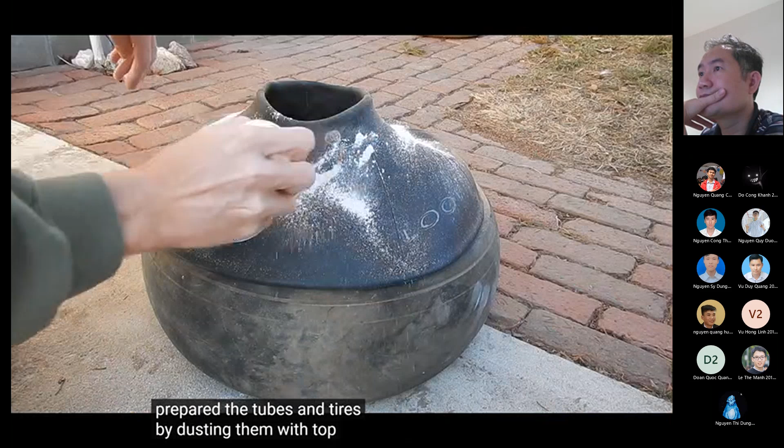Then I put the tube in the tire and put just enough air in the tube that it would fill the tire. Afterwards, the tire can be slid over the outside half of the wheel while feeding the valve stem through the valve stem hole.

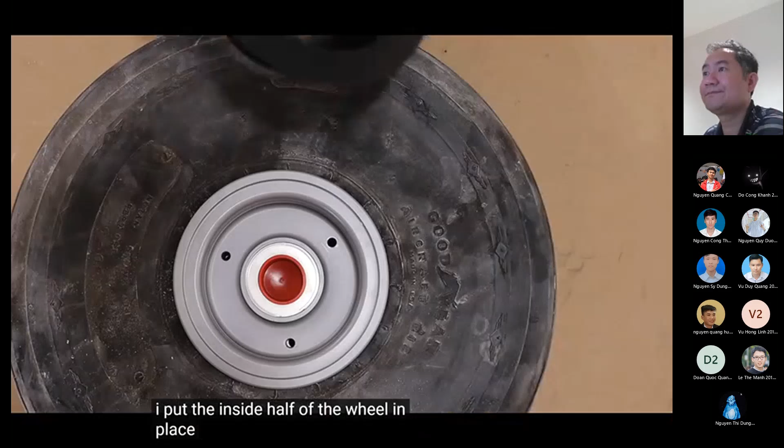Once I had double checked everything was lined up and wouldn't pinch the tube, I put the inside half of the wheel in place, followed by the brake rotor, and then finished up with the bolts and topped it off with air. I haven't decided for sure what size tires we're going to use, so for now we've put on a set of run-out tires so we can kick that ball down the road further.

Before installing the wheel on the axle, I cleaned it up with some fine grit sandpaper. Then I slid the wheel on and tightened down the axle nut appropriately and marked where to drill the cotter key.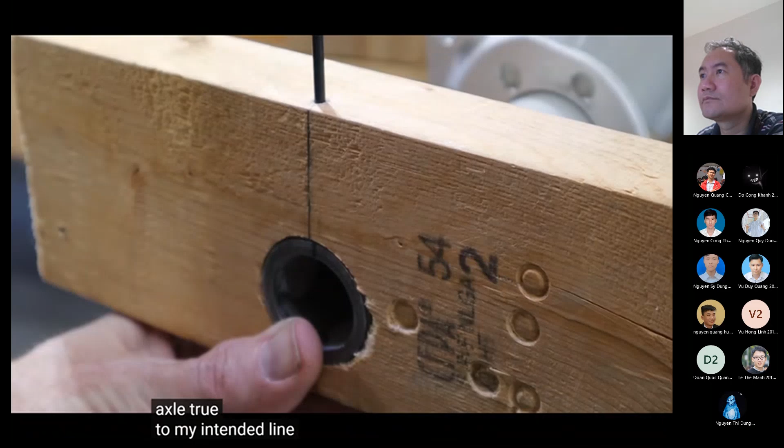My hand drilling isn't great, so I made a little jig to help me drill through the axle true to my intended line. Next, I put the brake calipers on.

The inside piece slides into place and the outside piece is then slipped into position and held into place with bolts that go through the inside piece.

With the gear and wheels in place, it was time to start routing the brake lines. First, I drilled holes for Adel clamps to secure the lines and drilled a hole in the center of the gear and installed a bulkhead fitting.

Then I installed the NPT to AN fittings in the brake cylinders, as well as the brake calipers. All NPT threads received Loctite 565 thread sealant.

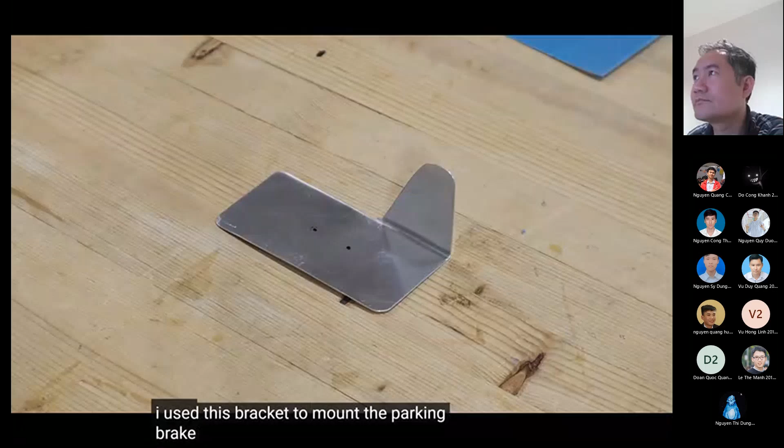Next, I made a little bracket out of 032 aluminum to mount the parking brake valve. I used this bracket to mount the parking brake valve on the former under the pilot's feet.

With all the fixed locations finished, I started bending the hard brake lines. The line in the gear legs, I had exit out the bottom on the inside and loop around the back of the gear leg to attach the calipers.

I'm told I need some sort of loop or S-bend to absorb a little bit of movement at the calipers. This large loop is probably overkill, but I saw it's how Colin did it on the Model 5 prototype, so I tried to copy it. Then I marked and made the appropriate bends to meet the bulkhead fitting at the top of the gear leg.